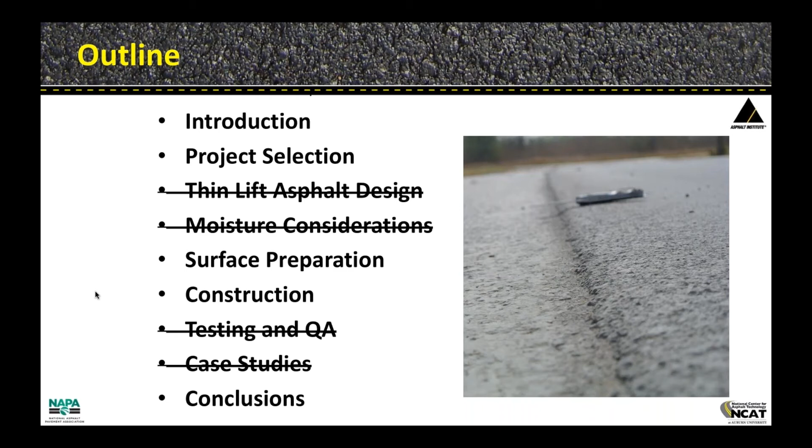In terms of the introduction, back in 2012 to 2014, I think the project ended. NCAT was contracted by NCHRP to develop a synthesis on thin asphalt concrete overlays, and they surveyed a number of states. I apologize, I don't know the number of responses, but what they found was, depending on the state agency, what did they consider to be a thin lift asphalt layer? As you can see by the responses, it went anywhere from 3/4 of an inch up to as much as 2 inches. Generally speaking, for the most part, state agencies that responded consider a thin lift to be 1.5 inches or less.

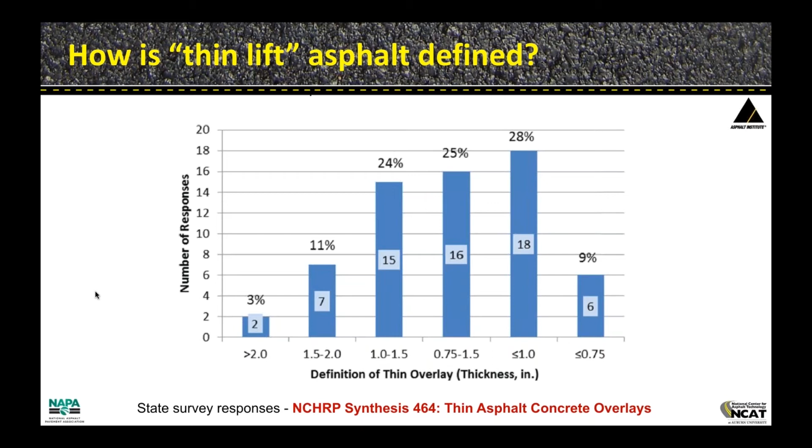The other thing with these materials, they could be a number of different types of mixtures. They could be a dense graded type mixture, superpave type mix, or gap graded like an SMA, or a number of agencies use open graded mixes such as an open graded friction course or porous friction course. They were also asked where are they used and for what reasons.

Some of them are using thin lift overlays as a preservation tool, so they are strategically planning them out, placing them at different times before they have any loss of serviceability of the road, trying to extend and maintain that high service level, before they're really starting to see any real loss of service. Other agencies are using them where they start to see some deterioration and loss of ride quality, whereas then they'll come in and put a thin lift in.

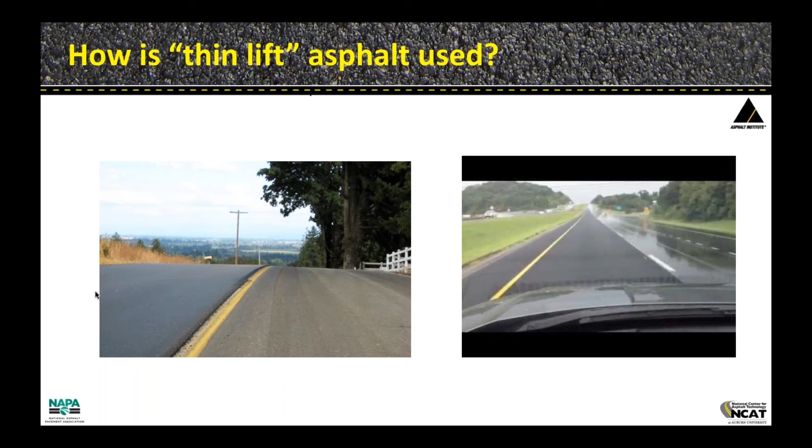Other agencies use them in locations where they're trying to cut down on wet weather safety issues, such as hydroplaning, the spray you get from wet pavements, as well as on a wet pavement at night, some of the glare you can get from oncoming headlights. So again, they're used for a number of different reasons in a number of different ways.

I want to talk a little bit about project selection. Thin asphalt overlays are really treated as a pavement preservation activity, not really adding much structural value to the pavement, although if done early enough, it can add some value. But just like any preservation activity or technique, choosing the right candidate project is really critical.

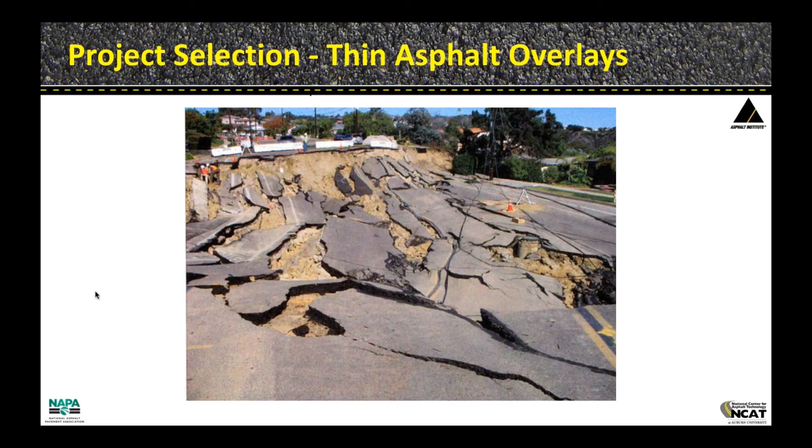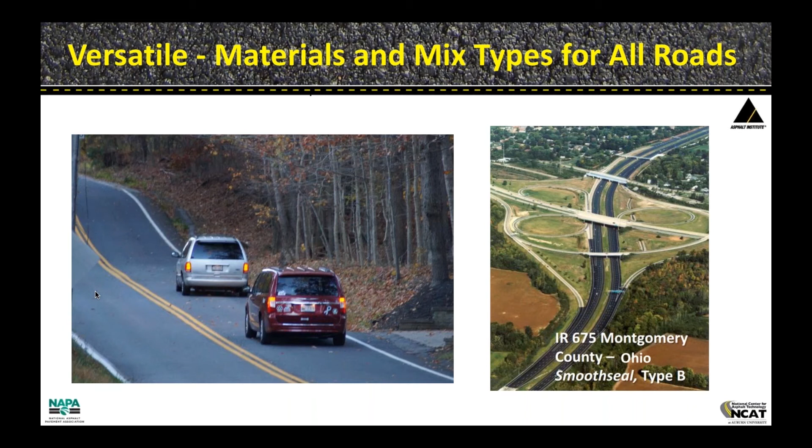These mixes have been found to be very versatile. They can be used on a wide range of applications in terms of traffic level. Obviously, the materials for lower volume roads would probably not be the same materials used on, for instance, Interstate 675 in Ohio, where they probably used a polymer modified material, maybe not on low volume roads. Put in the right application and on the right roadway, a good structurally sound pavement, they can perform regardless of traffic level.

Now, this table Danny and Mike and Ken put together, I think it came right out of the synthesis. You can see all the different types of distresses that we can experience in our roadway. The way this table is set up, going from left to right, you've got low severity versus high severity on the right.

For each of the distresses, anything in green would suggest that if you have that level of severity for that distress, that roadway could be a good candidate, and that a thin overlay would be effective on that project. Anything in yellow is starting to get marginal, where you might not meet the expectations of performance if you utilize them. And then anything in red is suggesting that particular project with that type of distress is not appropriate. One of the things that was mentioned is that red maybe shouldn't be called not appropriate, but maybe caution in terms of if you address that type of cracking or that distress, even though it was present, maybe it would be a good candidate.

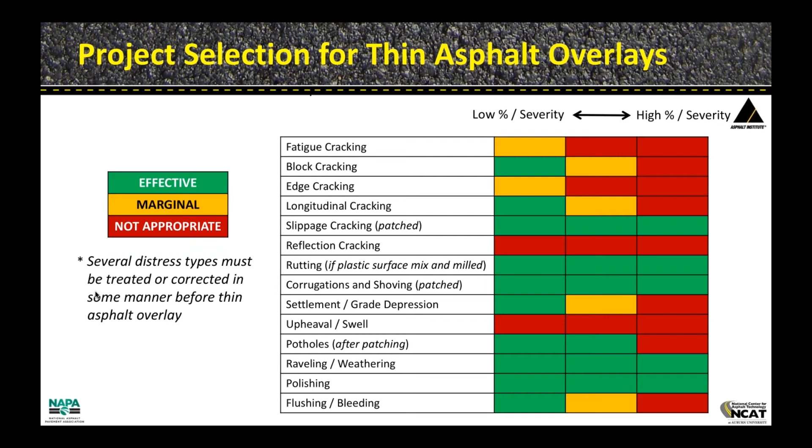For instance, if you took the first line and you had an isolated area of high severity fatigue cracking, if you were to remove that material, if the agency was, and replace it with good sound material and address the issues, then the thin overlay could be a good candidate or a good treatment.

Looking at surface preparation, anytime you have any rutting or cracking that's due to failure of the mix or plastic movement of the mix, all of that should be removed. You want to make sure that you remove down and get through all that distressed material and get into a good sound pavement. We all know the benefits of milling through having an improved smoothness, reshaping the cross slopes, and helping to get positive drainage away from the road.

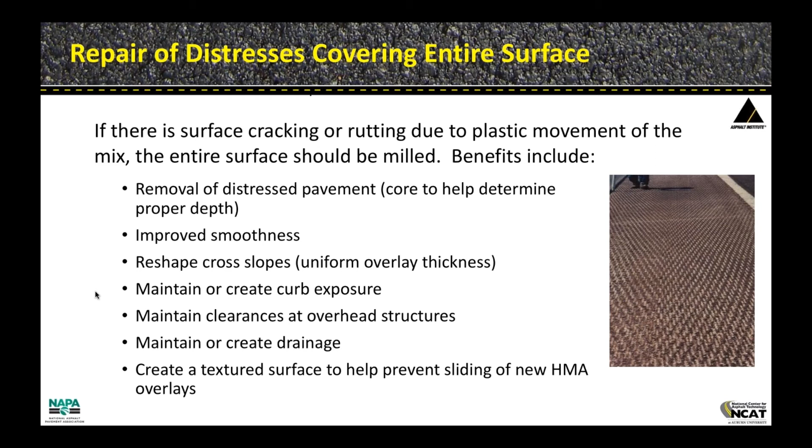In urban areas, we're able to maintain our curb reveal as well as clearances at overhead structures. So we all recognize the benefits of milling and how important it is to remove that distressed material for the thin overlay. You have to make sure when you do mill that you get down into structurally sound surface.

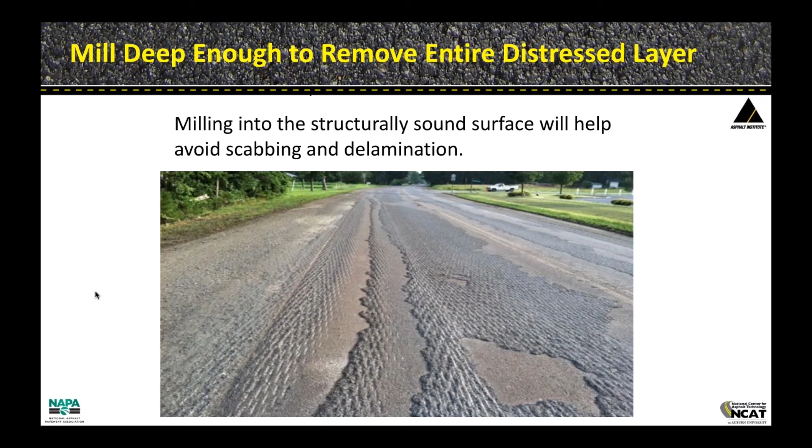This will help to mitigate any of this delamination or the scabbing that takes effect if you don't get down into that sound material. This is problematic when we try to place any kind of a thin overlay over a surface like this. If we have areas that are unlevel or uneven, it's recommended to do some type of a scratch course or a truing and leveling course.

Typically, these should be a very small nominal maximum aggregate size mixture, maybe 4.75 or even a sand mix. These are able to fill in those low spots and skim across the high areas. Really try to avoid anything with a large nominal maximum aggregate size for a T&L course. Absolutely try to stay away from coarse mixes. You want to stay on the finer side of the gradation.

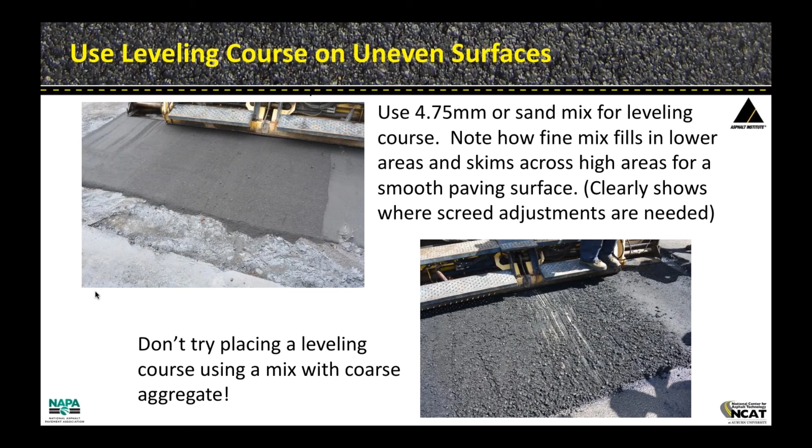In terms of construction of thin lifts, one of the things you have to really take into consideration is that because it's such a smaller mass of material, it's going to cool much more rapidly. Asphalt is a thermoplastic material, which means as it heats up, it becomes more of a liquid. As it cools down, it becomes more of a solid.

In order to achieve density, we need to have that liquid in a state that we're able to manipulate the mix and push those aggregates together. There's a couple of really neat apps that you can get. One of them is called PaveCool. This is the one we're showing here, but there's also one called MultiCool. I apologize, I forgot, one works on an Android device and one works on Apple devices. I believe PaveCool is the Apple device app.

They're really neat. You can go in and plug in your current environmental conditions. For instance, in this example, 50-degree air temperature. We're assuming for this example that the surface temperature was also plugged in at 50 degrees. Things like the sky, the latitude, the wind speed, the type of mix, the binder grade, lift thickness. In this case, we put in 3 inches and a mixed delivery temperature of 300 degrees Fahrenheit. And then also you can put in preferences as to what you want for a starting and a terminal value for temperature.

In this case, we put in 175 degrees Fahrenheit. So all compaction needs to be done before the mix reaches 175 degrees Fahrenheit. For this example, under these conditions, placed at 3 inches, we've got 44 minutes to achieve compaction. However, if you consider placing a 1-inch lift and have everything remain the same—air temperature, surface temperature, mixed delivery temperature, everything else remaining the same—to get to that 175, you now only have 7 minutes.

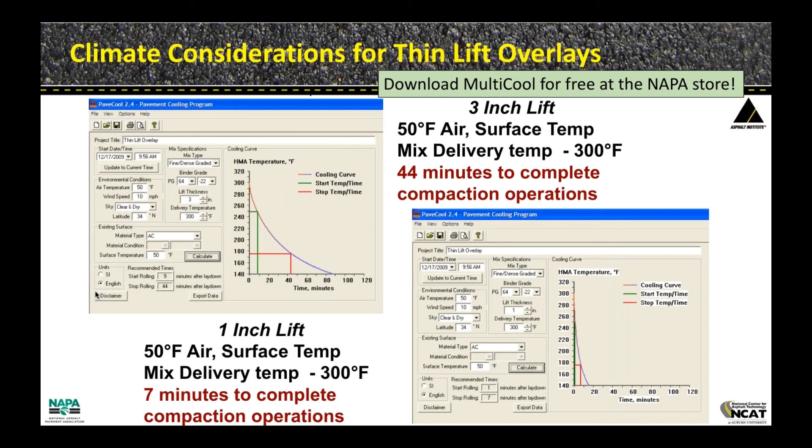So it's something that you need to consider when placing these thin lifts, that you have to stay on top of your operations and make sure that rollers stay up close to the paver, just because you have such a limited amount of time to achieve density.

What complicates this time for compaction is night paving. We see an awful lot of that in the Northeast. Cooler temperatures at night and higher humidity can cause that time for compaction to be reduced even further. One of the things we often recommend is that we don't put the material down until the tack has broken. Nighttime paving operations and cooler temperatures can slow that down as well. So again, just something to consider in terms of how much you're going to put down in a night.

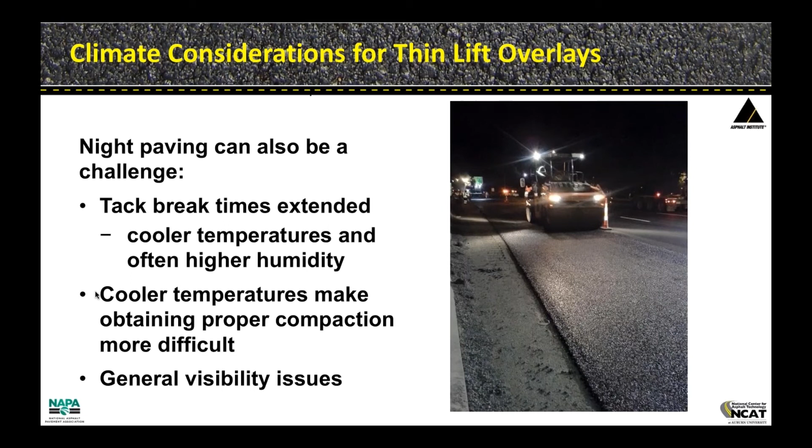All these things can slow down productivity. Tack coat itself is critical for any overlay or mix, but it becomes even more critical for thin overlays. The interface between that new layer and the old layer is so close to the surface, where you have those shear forces while vehicles are turning, stopping, and accelerating. It becomes even more critical that we have a good application of tack coat, not only in terms of the right amount of material, but also good uniform and complete application.

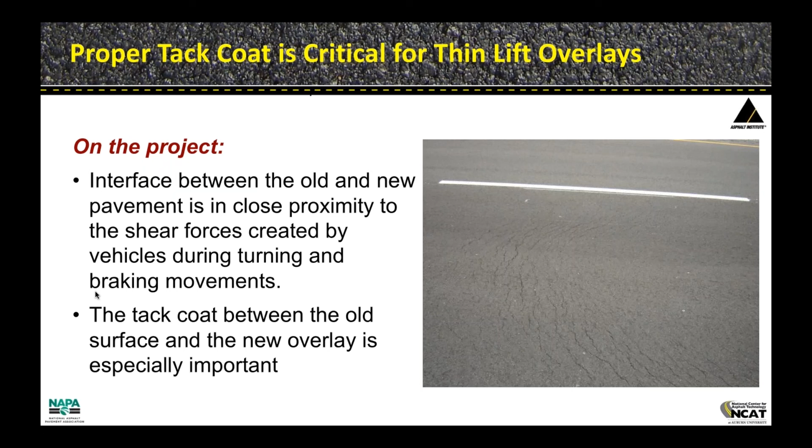Something we see an awful lot of: we lose the tack that gets picked up on the construction vehicles. This is a problem for all lifts. Some agencies have gone to these reduced or trackless type tack coats, and many have had very good success with those. But this is an issue not only for thin overlays, but for all overlays, and we want to make sure that we put the tack down and it stays where we put it.

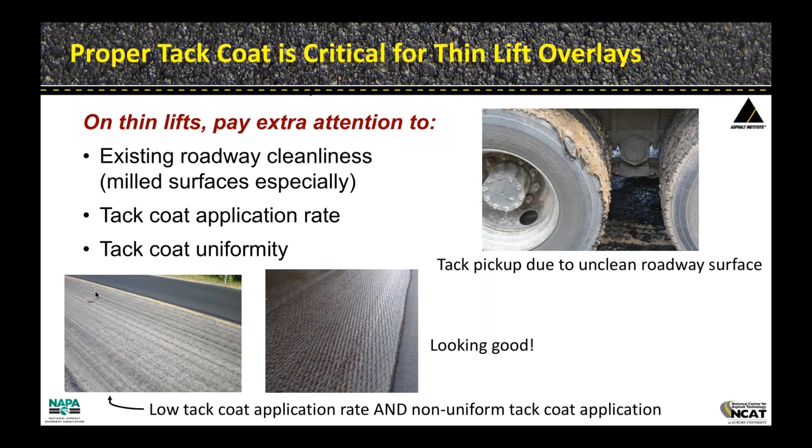Cleaning the material, cleaning the roadway before placing the overlay is really critical. Milled surfaces have become really difficult, especially in a lot of our operations in the Northeast, where everything is a mill and fill and open to traffic in the morning. A number of agencies have been starting to look at micro milling, allowing that milled surface to be open to traffic, sometimes as much as two weeks. During that time, they hope for a rainstorm, because that's really the best way to clean that surface. But again, you have to be very aware of the potential for tracking and how important it is to get that good application of tack coat.

What are the application rates? Well, what's really important is the residual rate, whether you're using an undiluted or a dilute emulsion. What we're really interested in is what's left after all the water leaves. This came out of our workshop that we had developed for Federal Highway Administration on tack coat. Depending on the surface that you're applying the tack coat to, the residual rate changes. Some surfaces are much thirstier, much more porous, and really can take more or require a higher residual rate than others. If you're paving over a new asphalt surface, you're going to be in that residual rate of 0.02 to 0.045 gallons per square yard, and again that's residual asphalt.

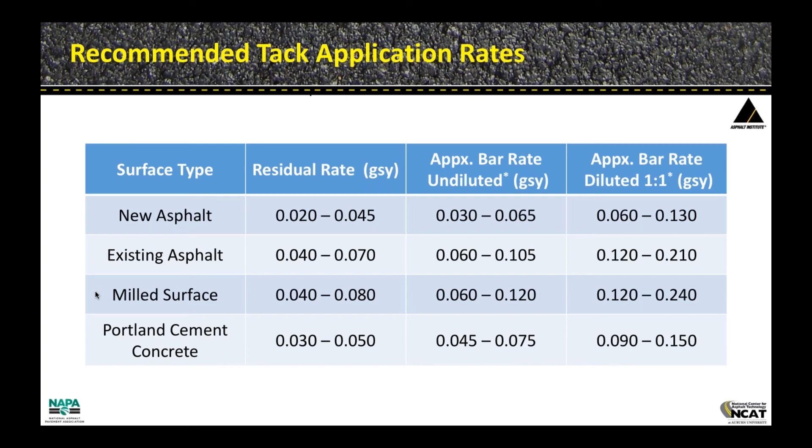The next column over is the approximate bar rate. So if you have an undiluted emulsion, you're going to spray a little bit higher rate, because that has some water in it. And then to the far right, if you diluted that 1-to-1. If you're on an existing asphalt surface, that's going to be a little more hungry for asphalt, a little more porous, quite likely, so you're going to typically see higher application rates. The same is true for a milled surface - you've got more surface area there. And Portland cement is somewhere in between a new asphalt and an existing or milled surface. So again, it's very important that we get enough material down, get the right residual rate, and make sure that it's put down uniformly, both transversely and longitudinally, and that it stays there.

Here's something that we have to reduce the urge on. Because these materials are being put down much thinner, the same amount shows up in a truckload, but each truckload goes a little bit further, and the paving operator tends to work off of production. So they're always trying to get as much down - it's just the nature of our business - as they can in a day. And because these materials are so much thinner, so many fewer pounds per square yard, it really entices or causes the paver operator to really want to go much faster.

I actually saw a video - one of our engineers was out on a paving project in South Dakota, and they were putting down a 3/4 or 1 inch overlay on an interstate, and they actually had the paver running at over 170 feet per minute.

Unfortunately, if you don't have sufficient rollers to keep up with it, then you're really shooting yourself in the foot. So you got to lose the urge to go faster. Really what's going to dictate how many feet per minute you can go with the paver is the number of rollers and can they keep up.

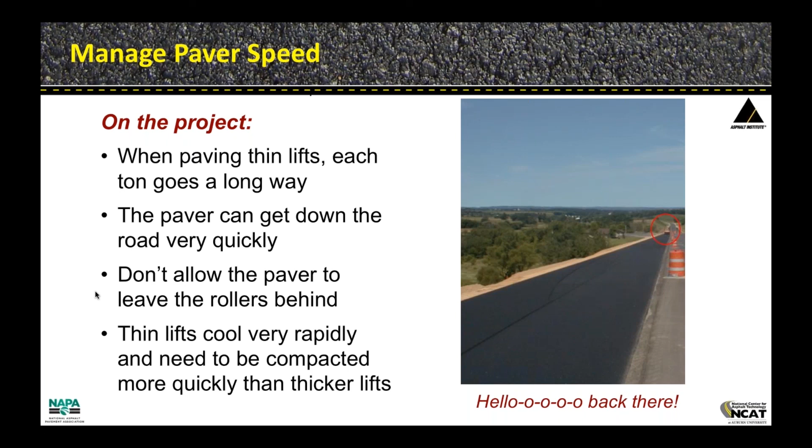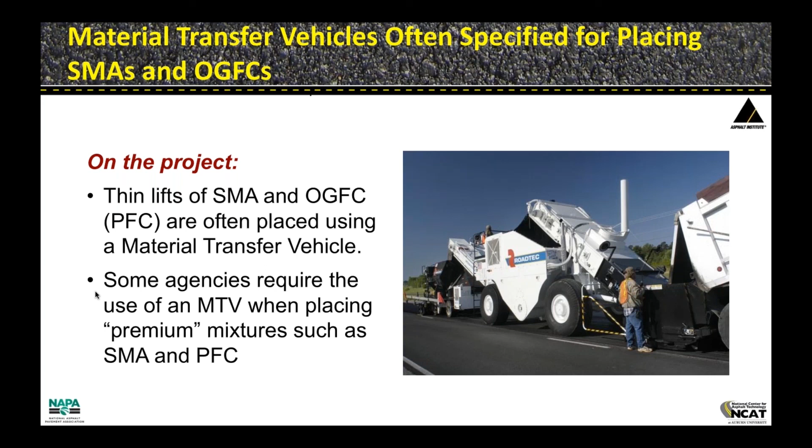This just gets back to the fact that these thin lifts cool so rapidly, and you have much less time to compact them. A number of agencies, especially for specialty mixes like SMA or open graded friction courses, will require the use of a material transfer vehicle. One of the beauties of these is that it will mitigate any segregation, both physical as well as thermal, and really can improve ride quality because you don't have trucks bumping into the paver, and the paver can run consistently. But again, you have to make sure your rollers can keep up.

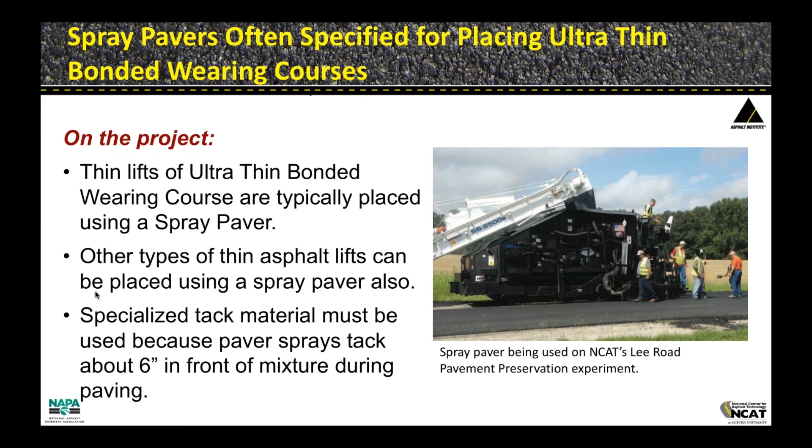Spray pavers, we've all seen ultra thin bonded wearing course and the success those materials have had over the years. We're starting to see other types of mixes, thin asphalt lifts, being used with those same spray pavers. Consideration should be given by the agency to look at some of the specialized tack materials used in these pavers. They've come a long way in terms of the ability to consistently spray material with this equipment. So we're seeing more and more of these being utilized, not only in thin lift applications, but in general.

In terms of rolling, depending on what your definition of a thin asphalt overlay is, if it's a Superpave and SMA, you may be able to use a vibratory roller in vibratory mode, typically on a very low amplitude setting. However, for a lot of these mixes, they are just so thin that you'll end up breaking aggregate and really hurting the ride quality, the smoothness. So for most cases with these thin overlays, especially when you get down less than an inch, typically they're going to use the vibratory roller, but just use it in a static mode.

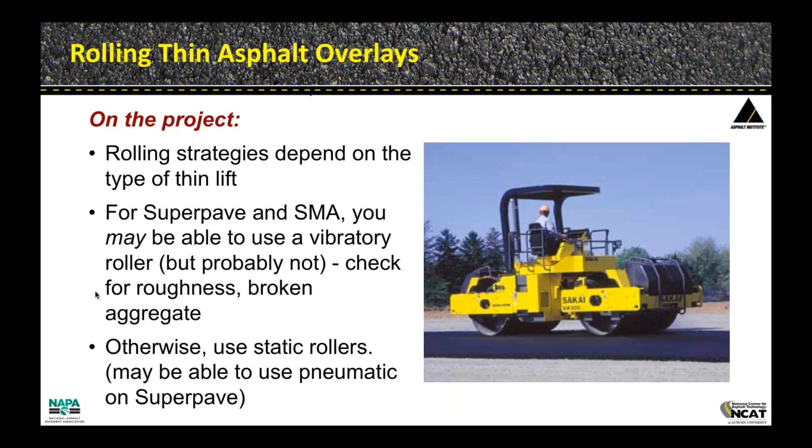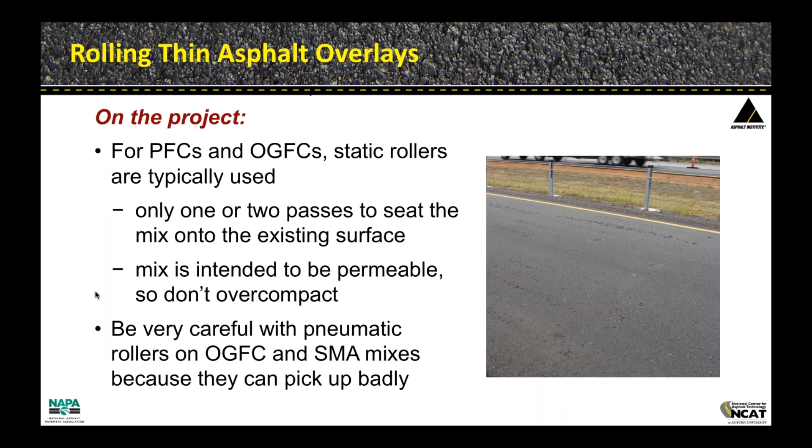For the open graded friction courses or porous friction courses, static rollers are typically used. One of the things you have to be aware of is that you don't want to over roll these materials. These are designed to be very high in air void content just by the nature of the mix, and how they want to be able to move water around the tires and cut down on spray. So don't over compact these. Typically 1 or 2 passes just to really seat that mix into the existing surface is sufficient.

So just to try to summarize a little bit, there's no standard definition of what a thin lift is, at least based on the synthesis that was done back in 2014. What they can be used for is to address functional issues, safety issues, and to maintain roadways in all types of traffic conditions as a pavement preservation technique.

Project selection, again, is key. Based on the survey results, a number of agencies found that when they placed these thin overlays on structurally sound pavements, they were getting upwards of 10 years of life out of those pavements. Again, these thin asphalt layers can be dense graded, which tends to be the most popular, but they can also be gap graded or open graded friction courses.

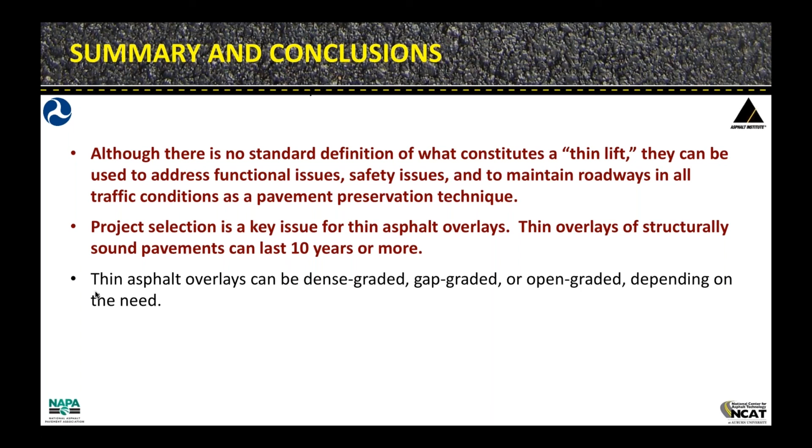Tack coat application, again, very, very important at the right rate, but also has to be consistent, both transversely and longitudinally, and we make sure the tack coat stays there and doesn't get picked up by construction vehicles. The time for compaction is greatly reduced for these thin layers. So again, have to be aware of that and make sure the paver doesn't get too far out ahead, and get away from the urge to go too fast.

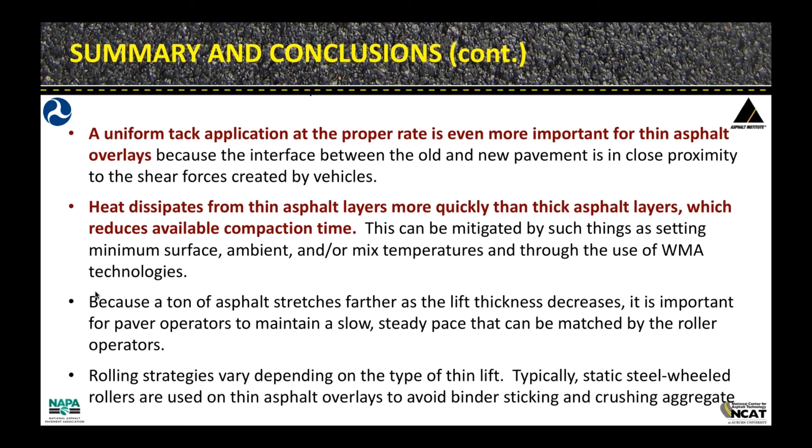Rolling strategies, again, are typically going to be, for the most part, steel drum rollers in static mode, whether it's the dense graded mixes versus SMAs or open graded friction courses.

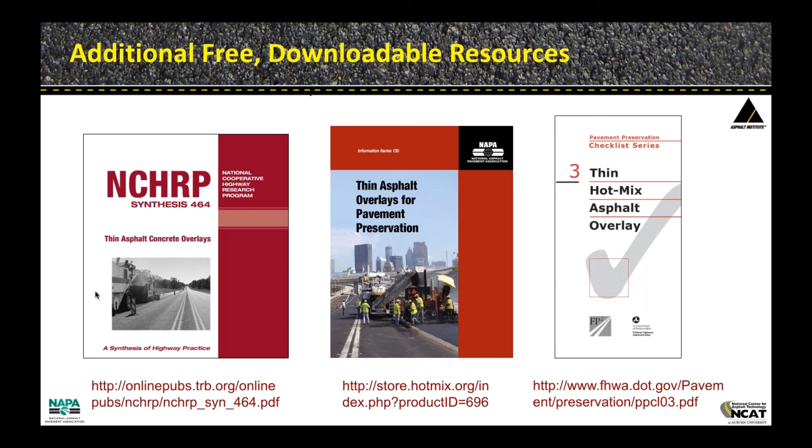Some free information is available. You can download the synthesis 464, and you see the link there. NAPA also has an informational series 135 that you can purchase, or maybe that's a free one, I'm not 100% sure. And FHWA has come up with a checklist for thin hot mix asphalt overlays. So with that, thank you for your attention, and thanks to our members for keeping me employed, and thank you.